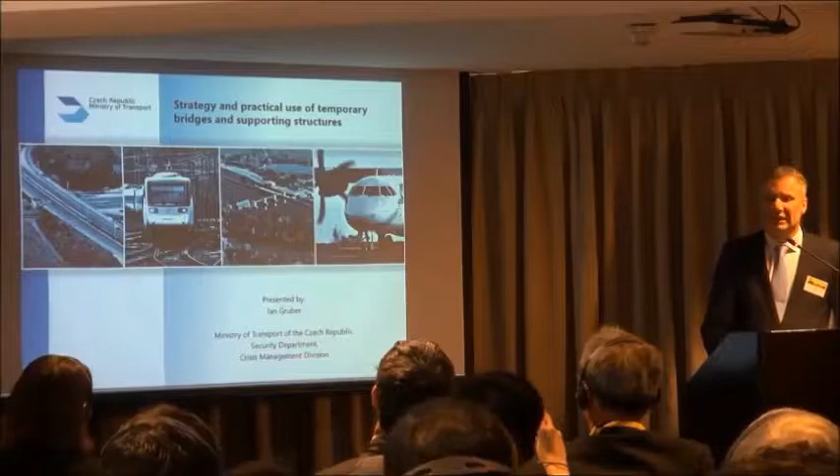My presentation is focused on the use of temporary bridges. This is the contents of my presentation. I'll skip very quickly - I'm sorry, I'm every time the longest presentation because I have 70 slides I want to show with you and share our findings with you.

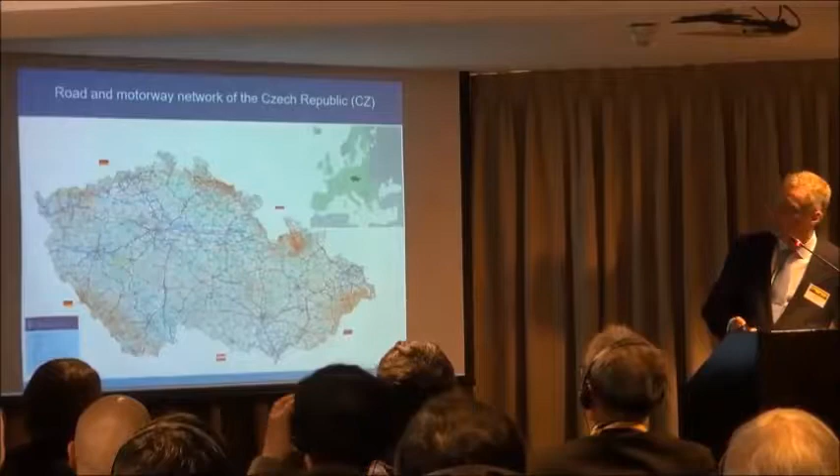First of all, I describe our country and our infrastructure. This is my country in Central Europe. We are really part of Europe, you can see in the left, on the right corner bottom. We have neighborhoods: Germany, Poland, Austria, and Slovakia. So we are not Czechoslovakia, we are Czech Republic because we separated in 1993.

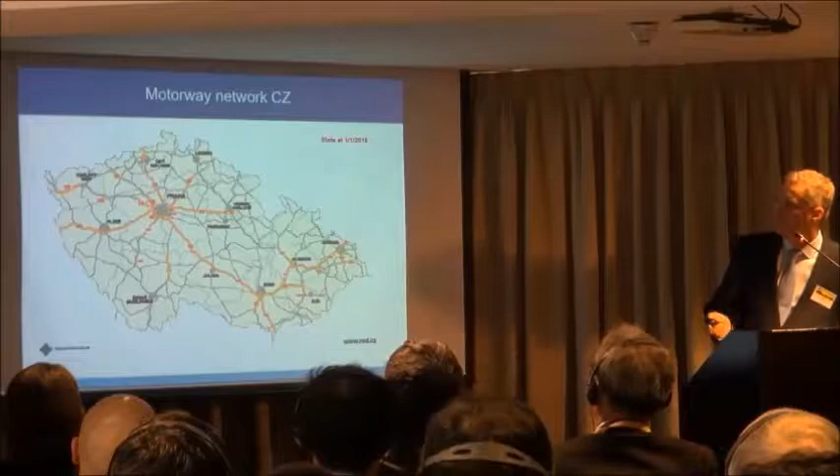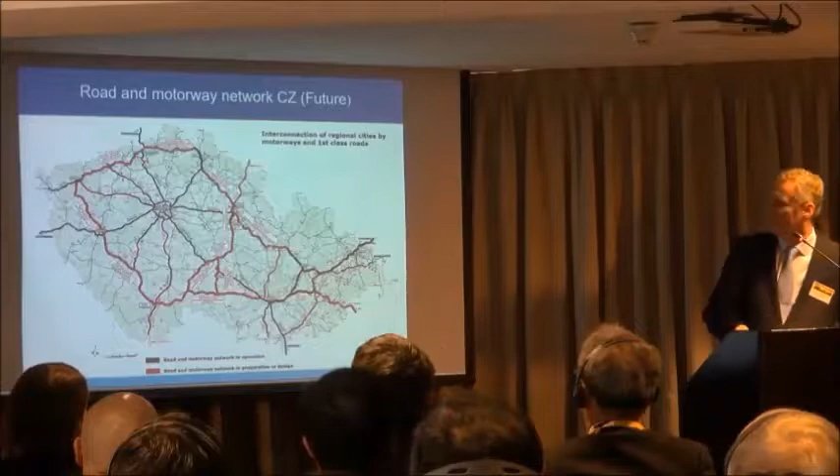This is the road and motorway network of Czech Republic. We have a very huge network, and this is only the state at 1st of January 2016 - only the motorway network, as you can see. This is some idea, a vision. We want to link every main city and region together. This is a vision, I don't know the timeframe, maybe 2030, maybe more. What is black is built, and what is red is our plan.

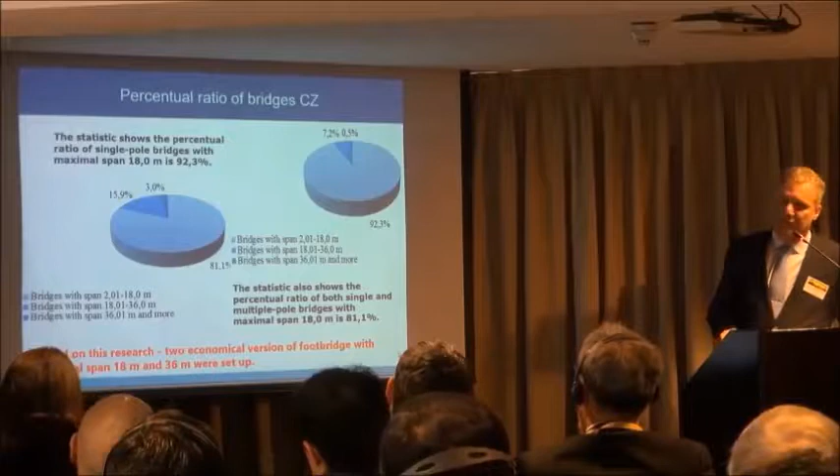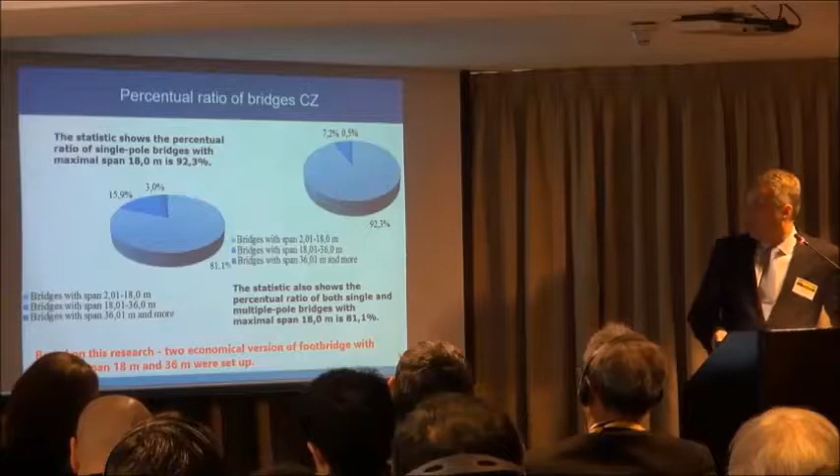On this infrastructure there are a lot of bridges, and the total is almost 1,700 bridges. From research it was found that the percentage ratio of bridges is against statistics - maximum span is around 18 meters for more than 92%, and statistics also show that the percentage ratio of both single and multiple pole bridges with maximum span 18 meters is 81%.

We face - obviously - almost always we face only floods. We don't have seas, so we don't have tsunamis, and we are in a very calm territory, so fortunately we don't have earthquakes either. So we face almost only floods.

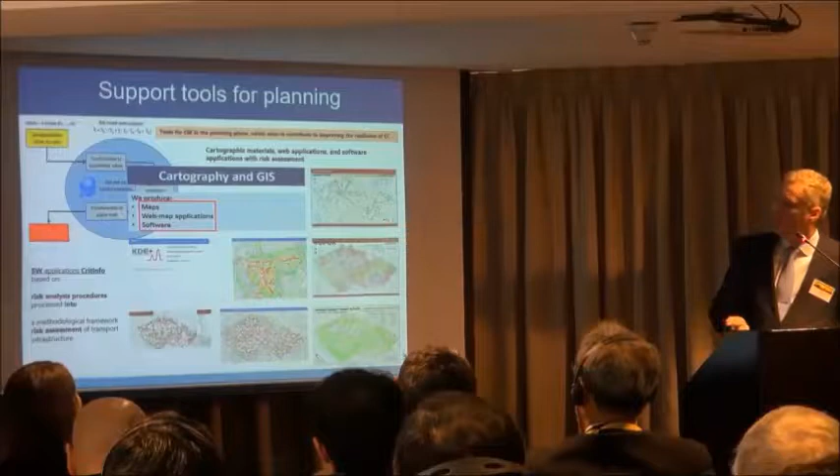How do we improve resilience of our infrastructure? We use support tools for planning, some tools for assessment of critical infrastructure, maps, web map applications, and software, which are developed especially by the academic sector.

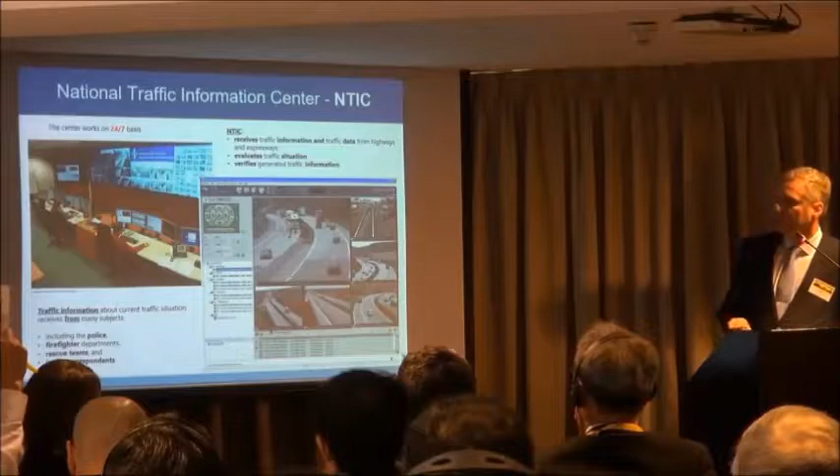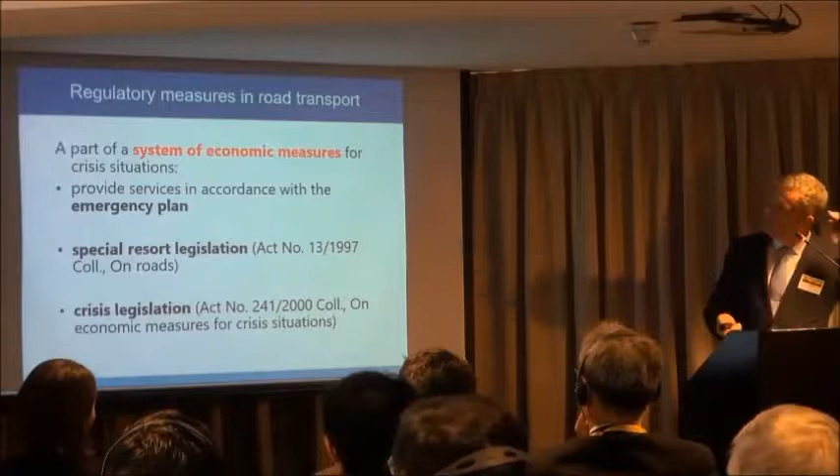We have regulatory measures for road transport, and especially systemic economic measures for crisis situations. We provide emergency plans and special resort legislation, and we use special crisis legislation as well. This is a volume of three special crisis legislations covering the integrated rescue system, crisis situations, and developing resources for crisis situations.

The main task of resilience is, of course, in transport - maintaining the mobility and functionality of bridges. For us this is particularly critical. The Ministry of Transport directs its efforts to repair damaged or destroyed bridges in crisis situations by replacing them with temporary bridge constructions.

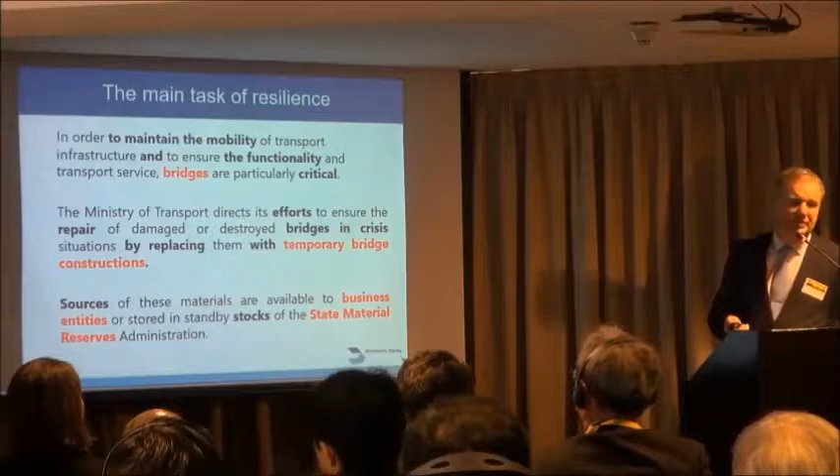We have two pools of sources: private companies, obviously construction companies, and we develop stocks and state material reserves. This is the administration - sorry.

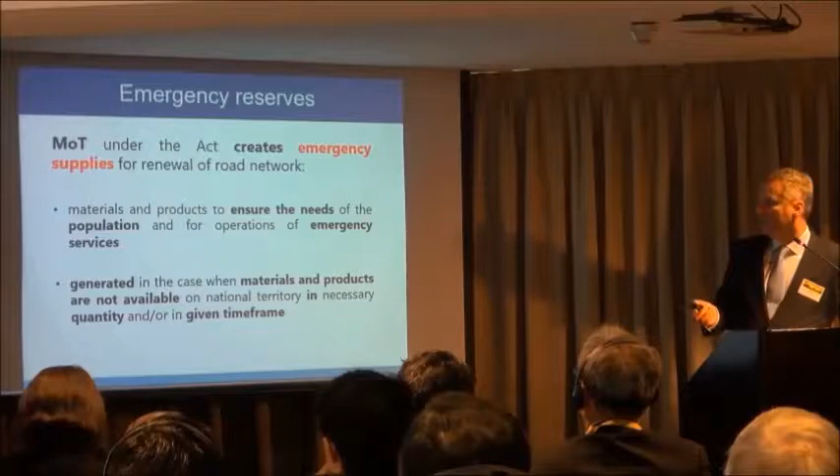Emergency reserves are created as emergency supplies by the Ministry of Transport. This is under an Act of the Ministry of Transport. These materials are intended to ensure the needs of the population and emergency services, in case needed materials and products are not available in the territory in the necessary quantity within a given time frame.

There are pictures that show how we do it. I'll skip this.

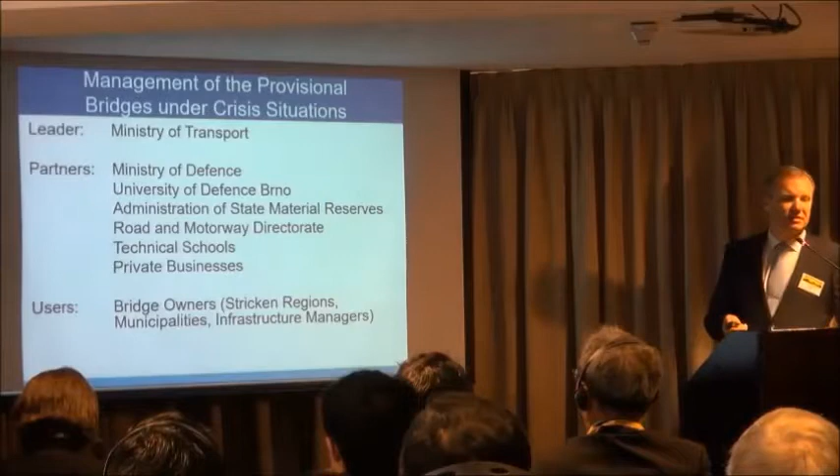We have a system for management of provisional bridges. Who is who: the key leader, of course, is the Ministry of Transport. We have a lot of partners, especially the Ministry of Defense, University of Defense, Administration of State Material Reserves, Road and Motorway Directorate, technical schools, private businesses, and of course users - bridge owners, stricken regions, municipalities, and infrastructure managers.

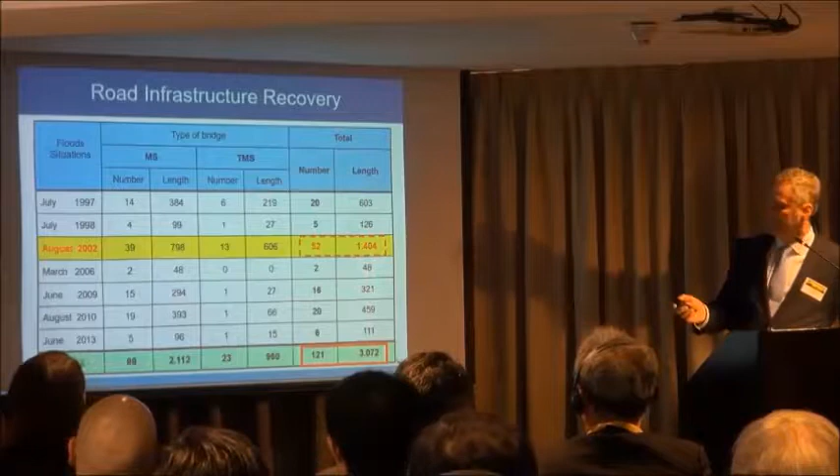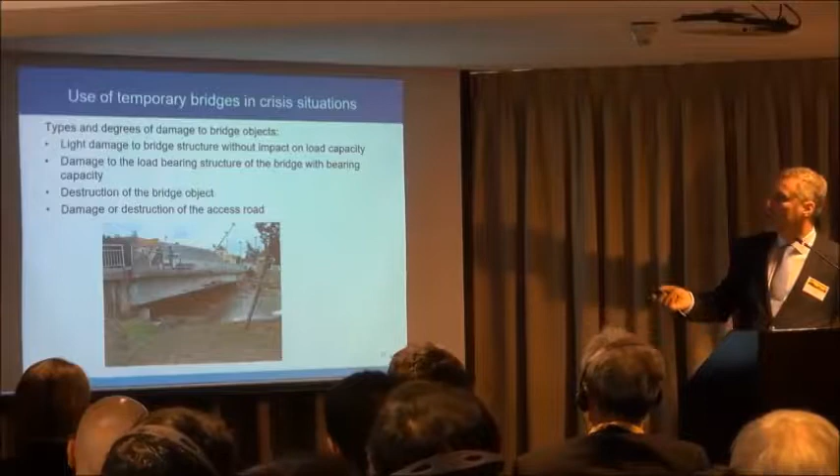What are the basic technological procedures for bridge renewal? We recognize 4 degrees of damage to bridge objects: light damage to the bridge structure without impact on load capacity; damage to the load-bearing structure affecting bearing capacity; total destruction of the bridge object; and damage or destruction of the access road.

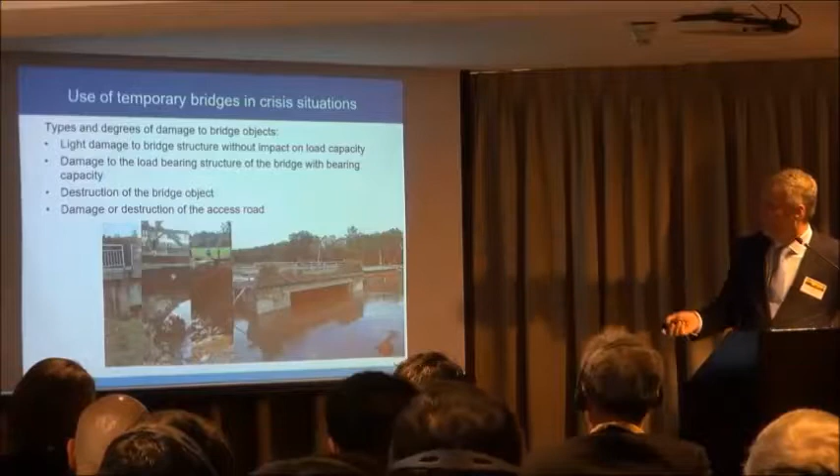So this bridge here is in good condition, but it's not possible to get on it.

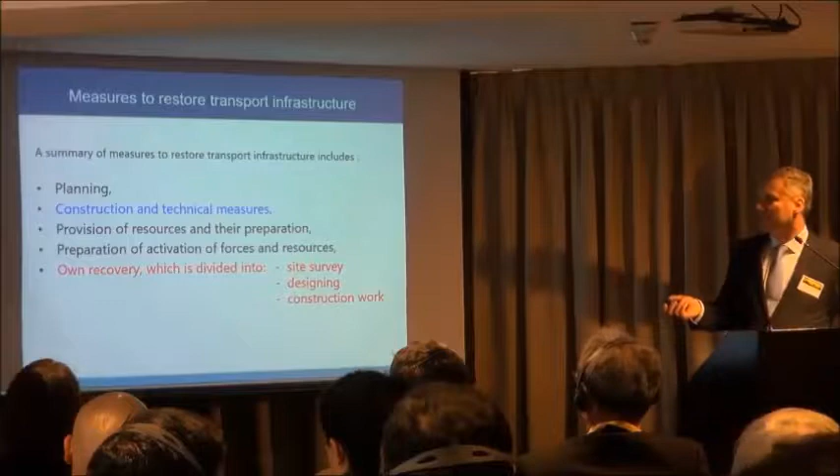Here is a summary of the measures to restore transport infrastructure: planning, construction technical measures, provision of resources and their preparation, activation of forces and resources, and recovery, which is divided into site survey, designing, and construction work.

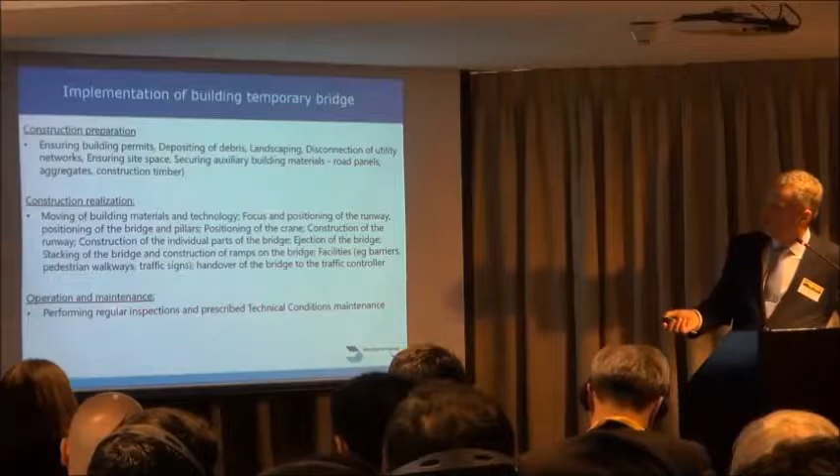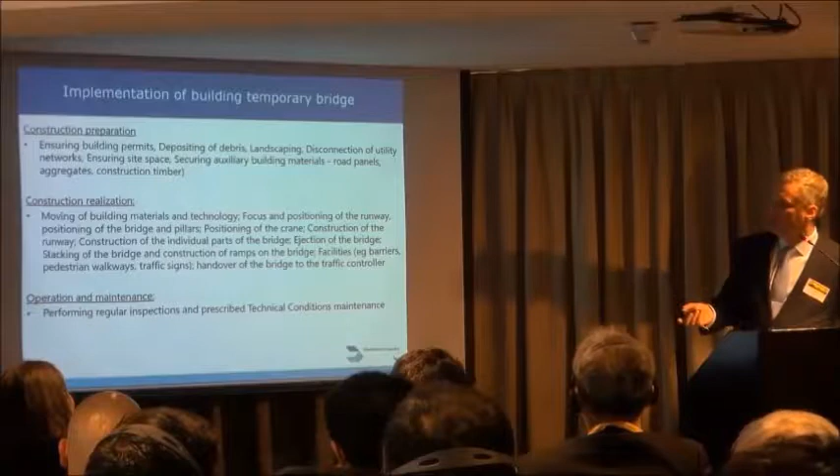Again, this is a summary of what is necessary to do. I underline the last item, operation and maintenance, especially because this is what you see in the last slides—that is very important. Maintenance after something is built.

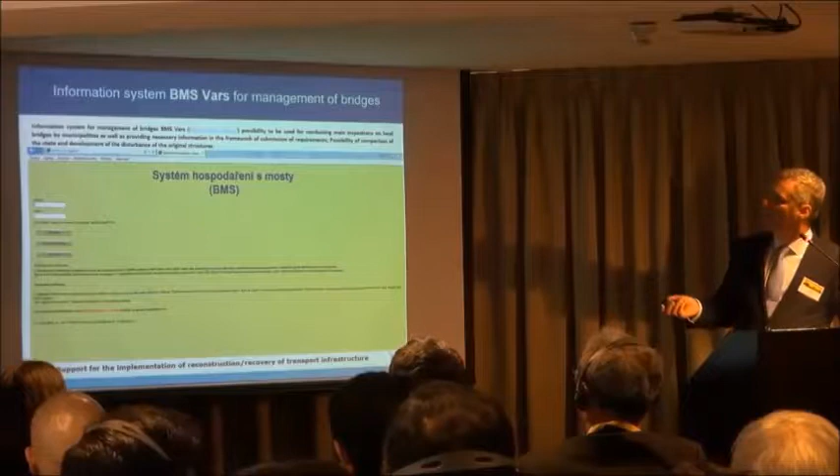We use information systems to support designers, local authorities, and owners of bridges. Technical conditions are promoted on the website of the Ministry of Transport.

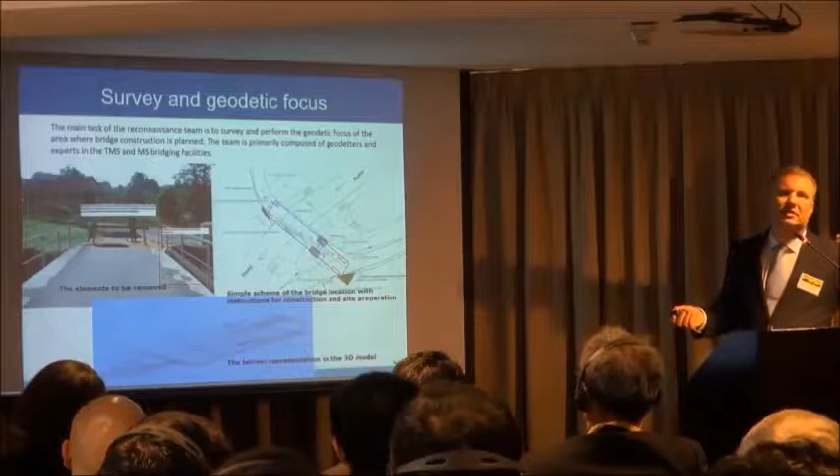For survey, the geodetic focus, we use forces from Defense University in Brno, which work in the terrain developing surveys, and are also able to develop 3D model representations, and design solutions for local and other authorities.

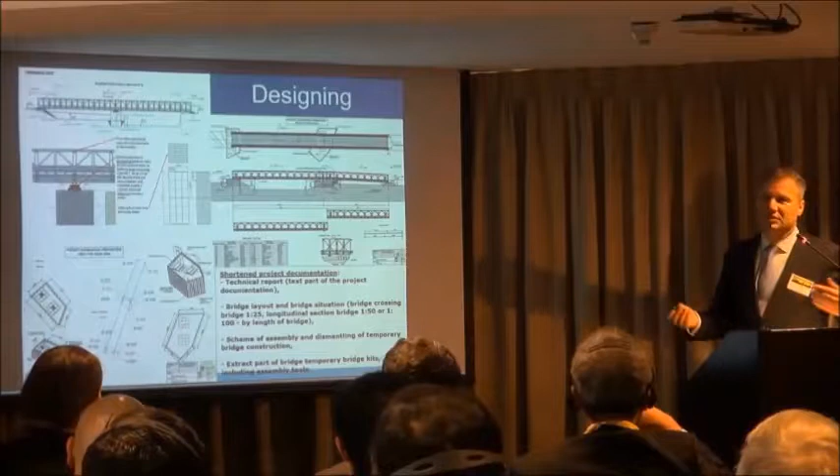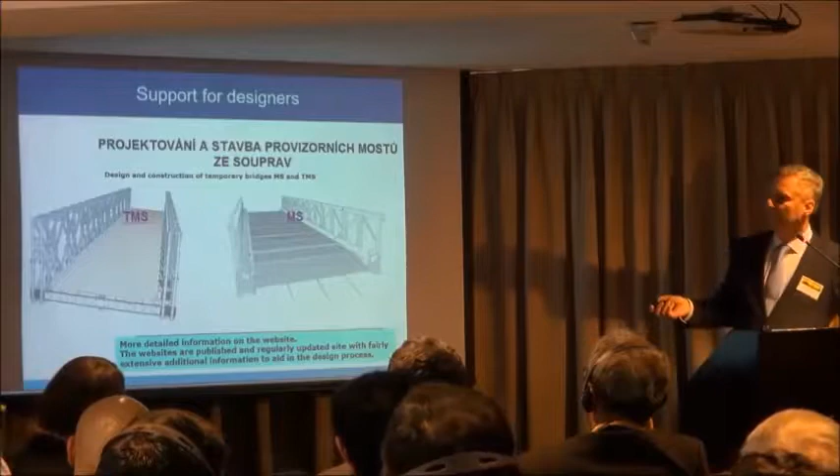This project includes technical report, bridge layout, and everything—schemas, assembly, dismantling, extract part of bridge, and temporary bridge kits, everything. Again, we support designers with websites and tools.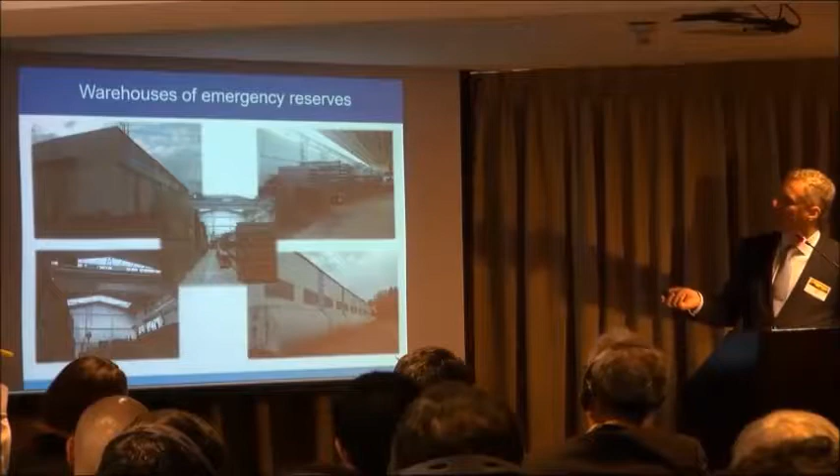Something about emergency reserves—this picture shows warehouses of emergency reserves. These warehouses are situated territorially and allocated in reasonable quantity. We need to have access to some warehouse every time. This is the current situation.

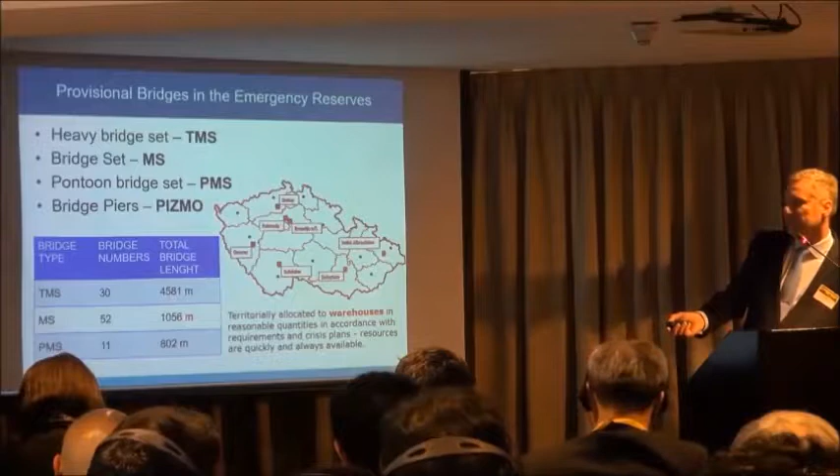Almost more than 5 kilometers of temporary bridges, and this pool includes the heavy bridge set TMS, the pontoon bridge PMS, and the bridge piers PIZMO.

Some pictures about these constructions: the heavy bridge set TMS. These constructions are only one line. This is a steel framework structure assembled from individually pre-manufactured components.

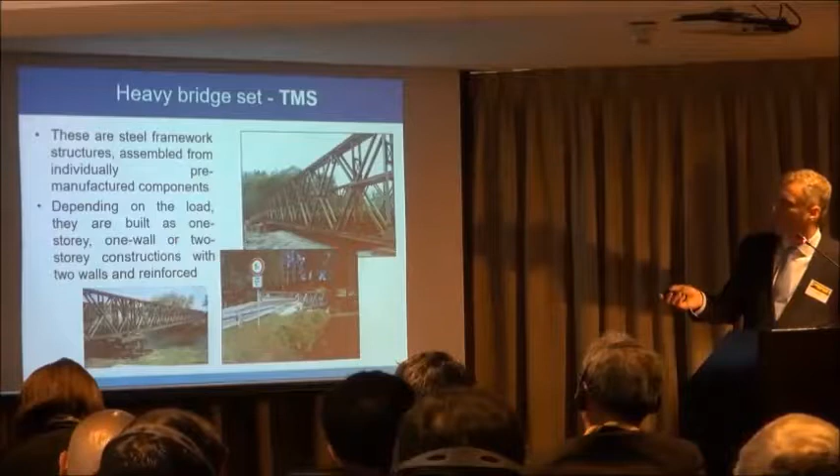This bridge set MS is composed of full bridge parts of 3 meters length. One part, then a second part, linked together. This previous construction was characterized by very quick construction.

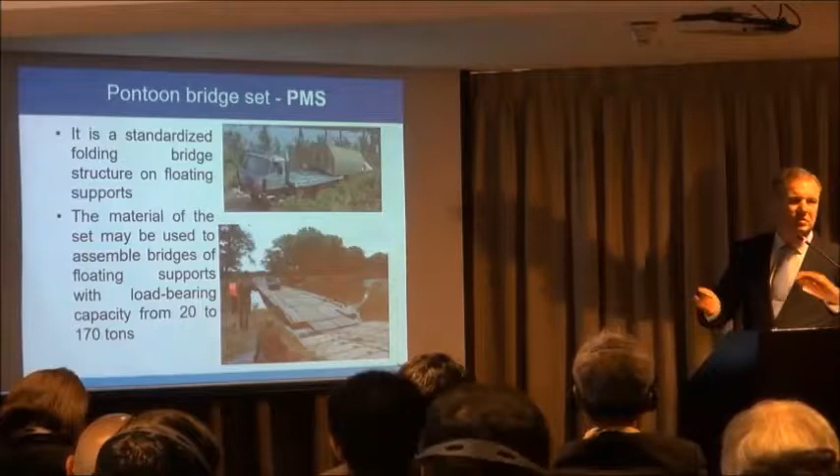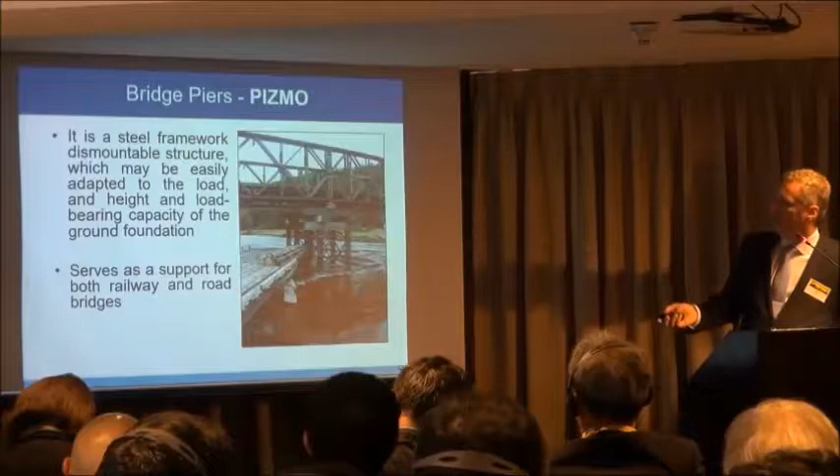The pontoon bridge PMS is only for military forces, and in some cases only for rescue services, but not for civil users. The bridge piers PIZMO is a steel framework dismountable structure used as a support for both railway and road bridges.

What is necessary? You have sources, and you have to have human resources as well. So we train people, and we keep in mind that it's necessary to develop everything, including new constructions.

The security department organizes professional courses in a very simple but useful place. As you can see, course participants are trained and educated, and they come from private construction companies, planning organizations, emergency department employees, and students from civil and military universities and colleges. Everything is free of charge for everybody, because it's funded from the Ministry of Transport budget.

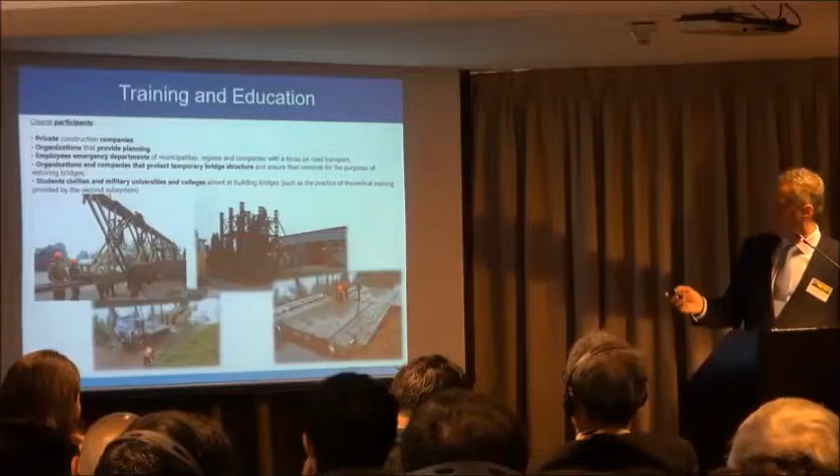This is the new prefab bridge road MMS 2005. As you can see from the number, 2005, it was designed as a single-lane bridge after the floods of 2002.

This construction is used in the design developed for the civil sector, designed in accordance with the relevant standards and other applicable regulations in the Ministry of Transport's domain, as you can see.

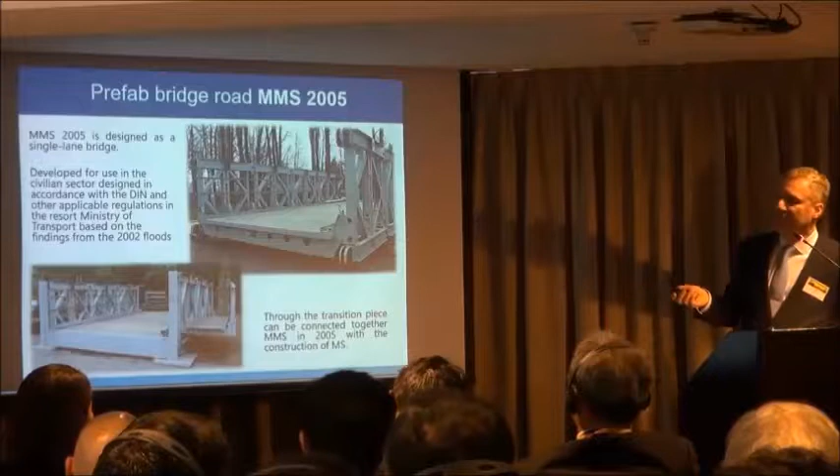After 2010, a small footbridge and temporary bridge for pedestrian and bicycle traffic was also developed, ranging from 3 to 8 meters.

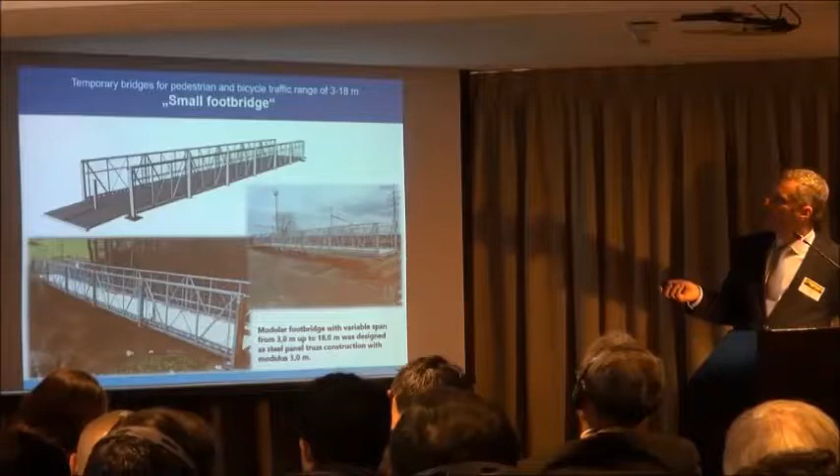Because the military construction doesn't have space for traffic, it's not possible to separate pedestrian and cycling traffic. So we have two footbridges, small and big, ranging in length from 3 to 36 meters.

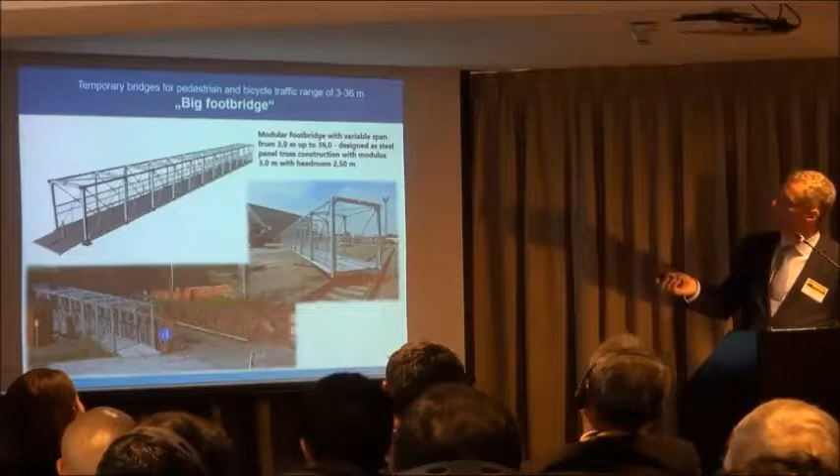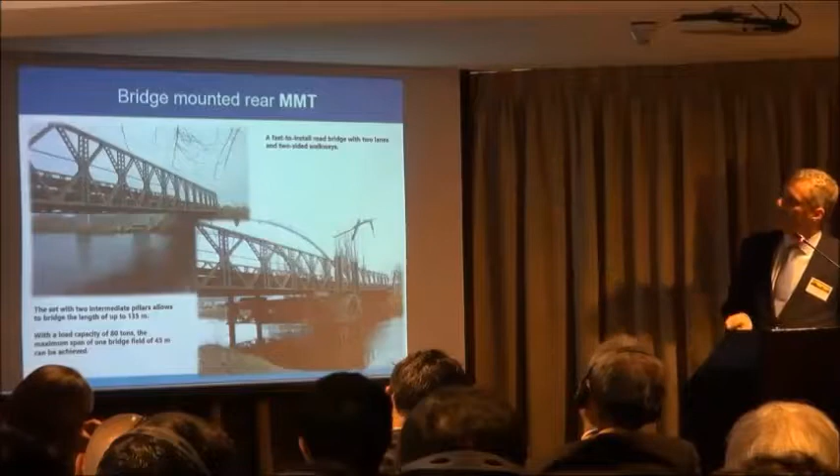We have other resources as well—again a former military structure, but this one is two lanes, the bridge-mounted rear MMT. We have, for example, a plate bridge for quick casting, with small construction height, useful for securing oversized transport, as you can see.

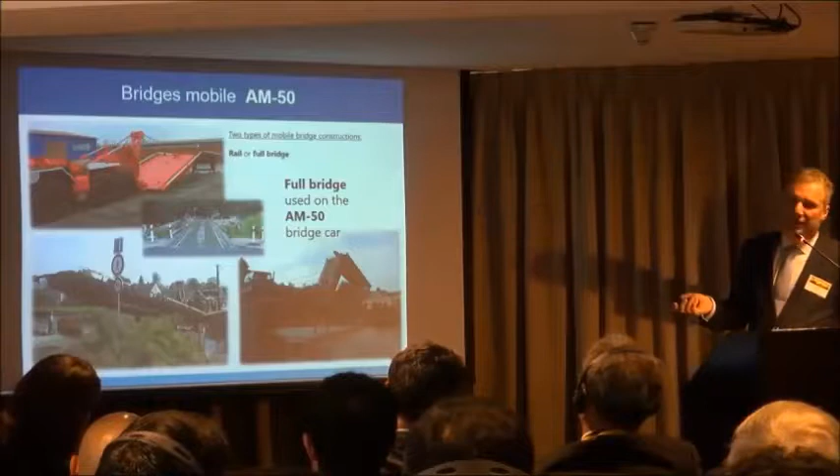We have bridge mobiles, rail or full bridge. This full bridge is used on the bridge car AM50, for rescue services—very quick evacuation. Or the rail bridge, which is used on the bridge tank MT-55 A.

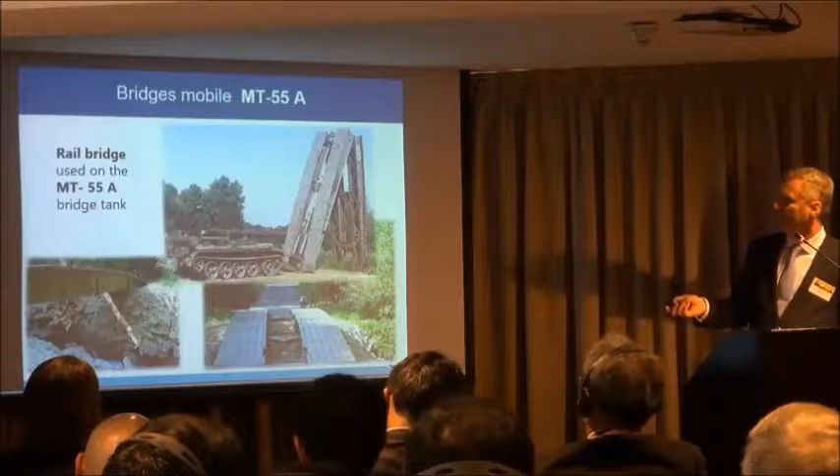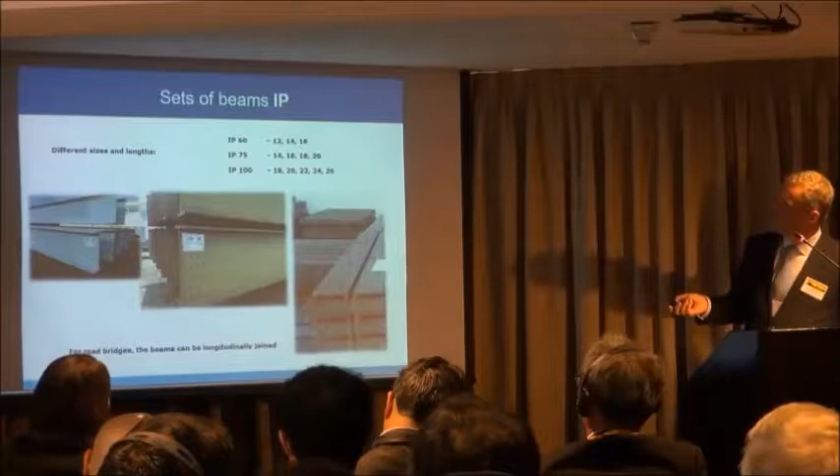During this time, we found ways to use other materials originally intended for rail transport. One of them is the set of beams IP in different sizes and lengths, and the temporary railway bridge ŽM-16, used for road traffic, as you can see.

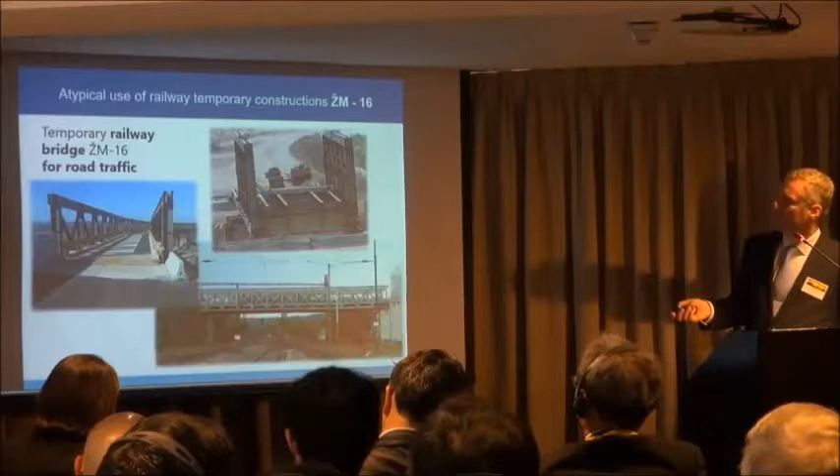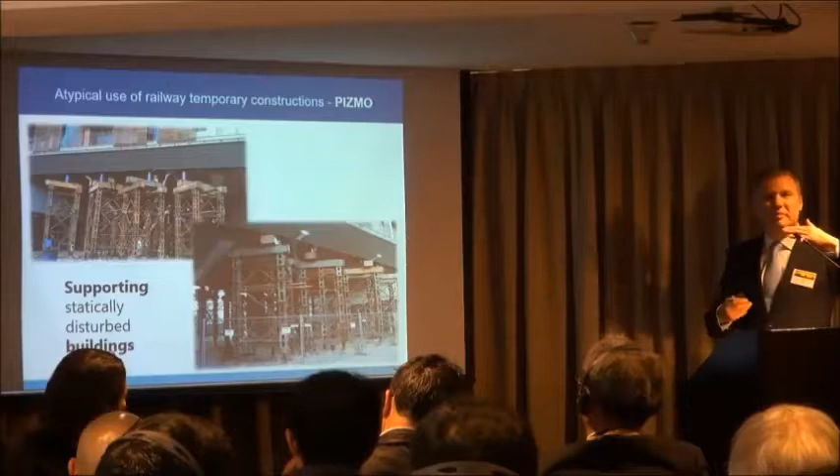This is a new example from Prague, using supporting for statically disturbed buildings. It was in Prague, I don't know exactly when, 2013 or 2020, a new construction technology. After a very quick change in temperature from 38 degrees Celsius to maybe 10, there was a problem with these new buildings.

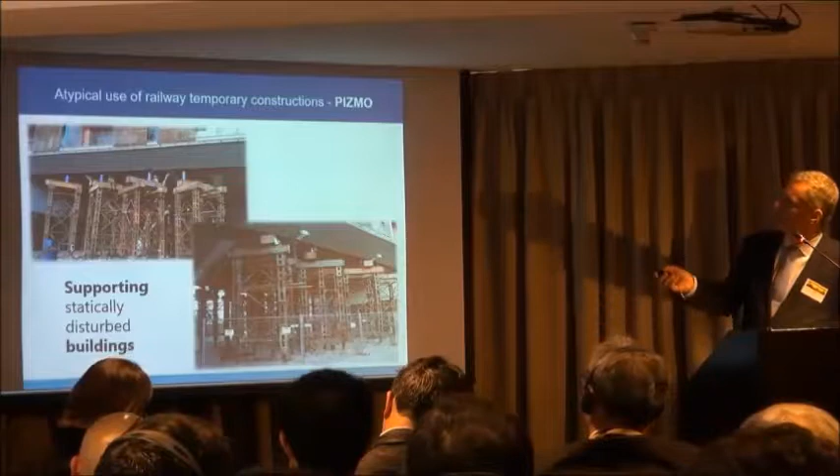So this is supporting statically using this construction.

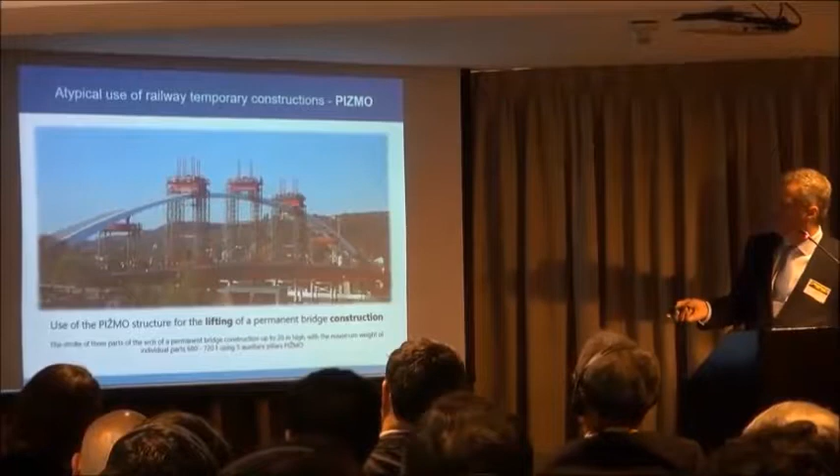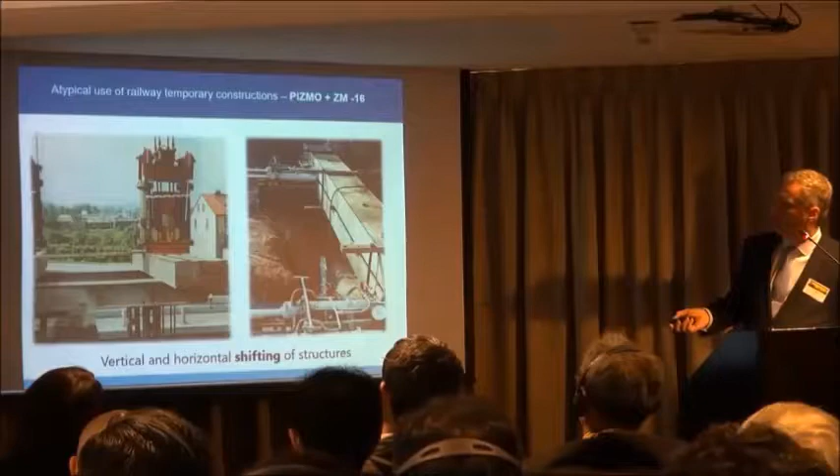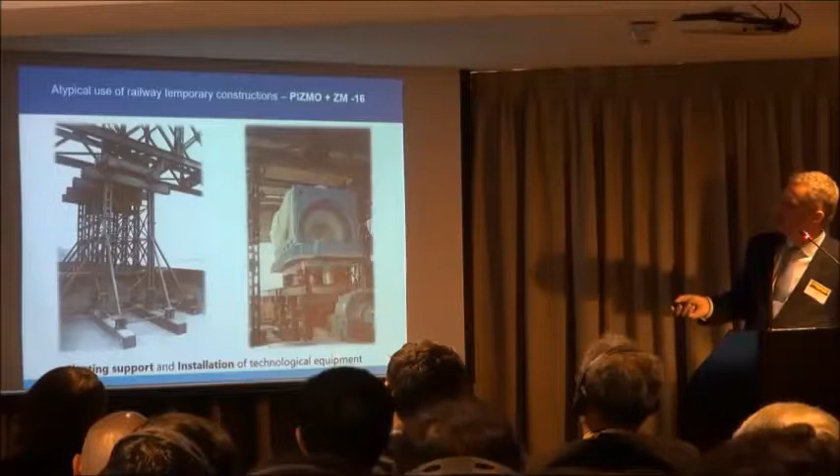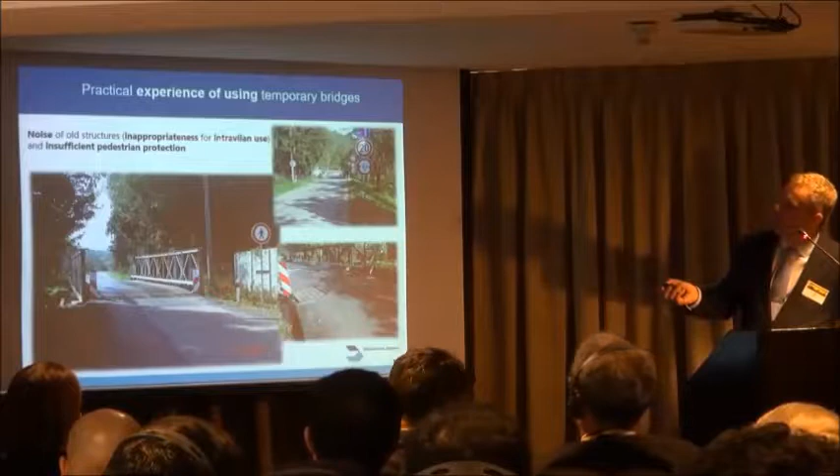What is the problem is noise. If you use this construction, because this is all military construction, noise was no problem for military, but for civilian sector it's of course a problem. So it's inappropriate for use in intravilan, and there is insufficient pedestrian protection, as I said.

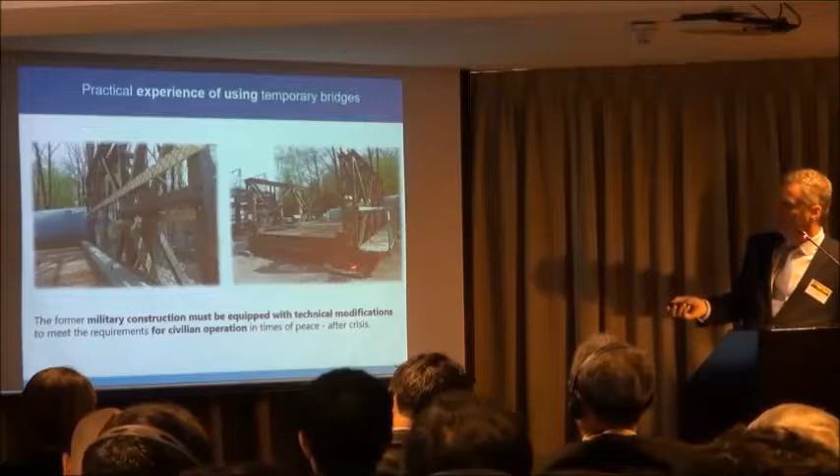We solve it this way: this military construction must be equipped with technical modification, very simple modification for civil operation.

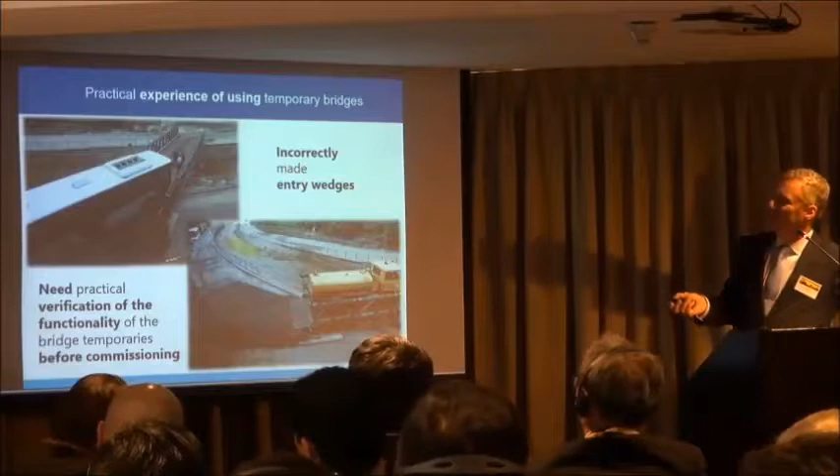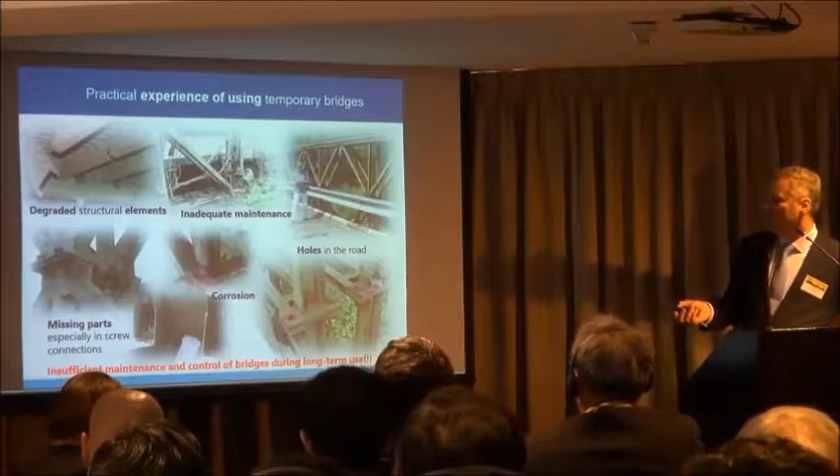This is the impact if there's no maintenance after building: degraded structural elements, inadequate maintenance, holes in the road because it's a wooden road, even missing parts, especially in screw connections, and corrosion of course.

This is really a missing screw. It's horrible, but that's real. So this is the problem if it's long-term use.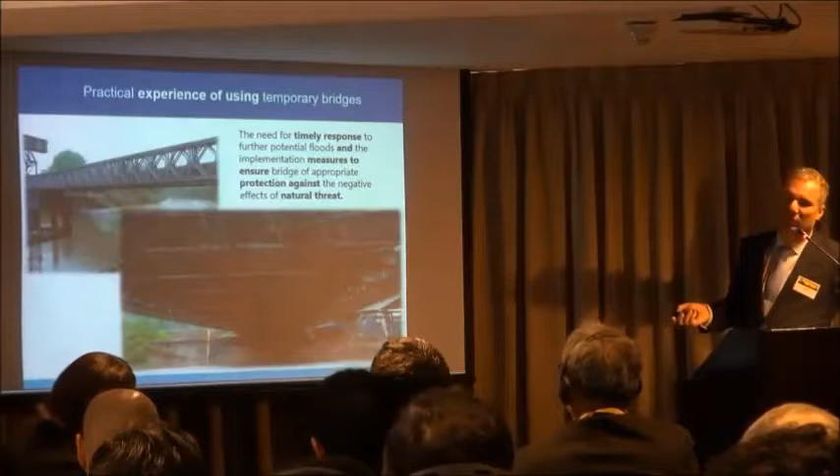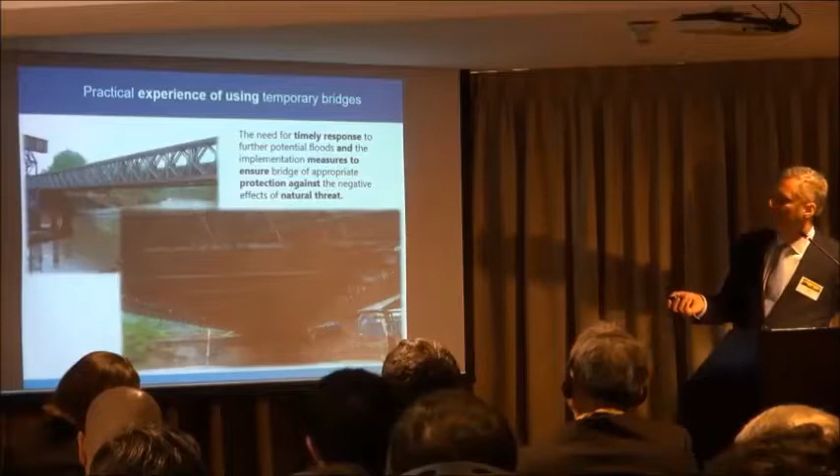Practical experience shows it's necessary to have a timely response to potential floods. Temporary bridges were built for normal construction during the construction of a new highway, but after that there were new floods, and as you can see, it was necessary to clean everything. So a very important quick response.

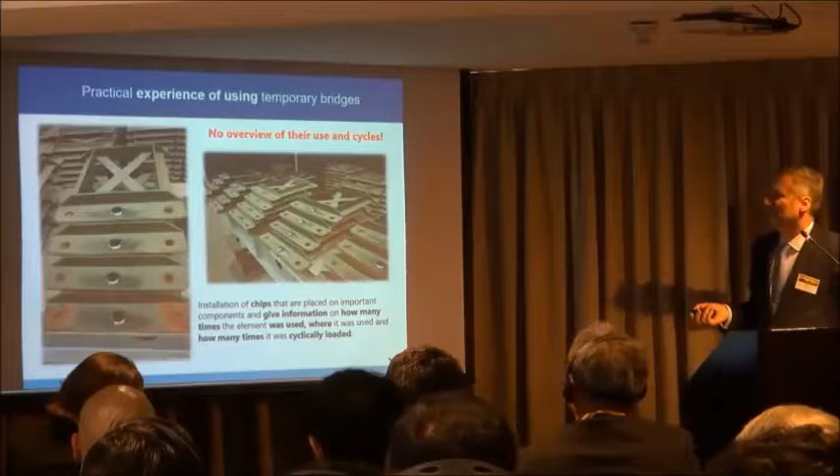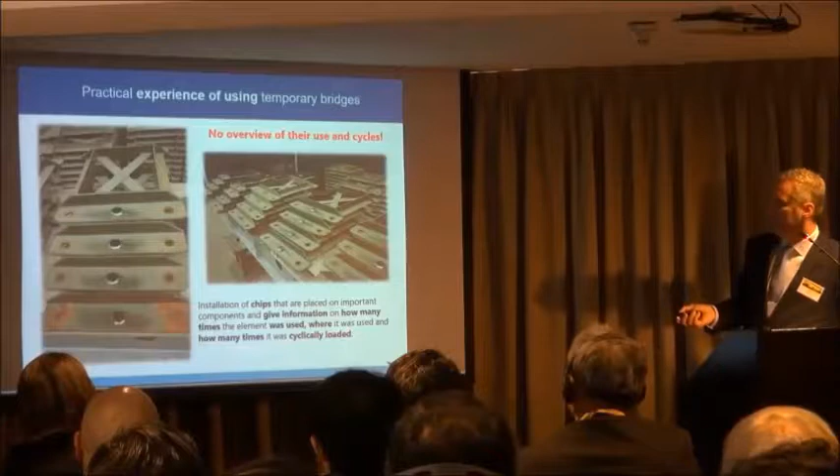Another problem is we have no overview of their use and cycles. That's the problem, so we try to solve it with the installation of chips that should give information on how many times it was used, where, and how many times it was cyclically loaded.

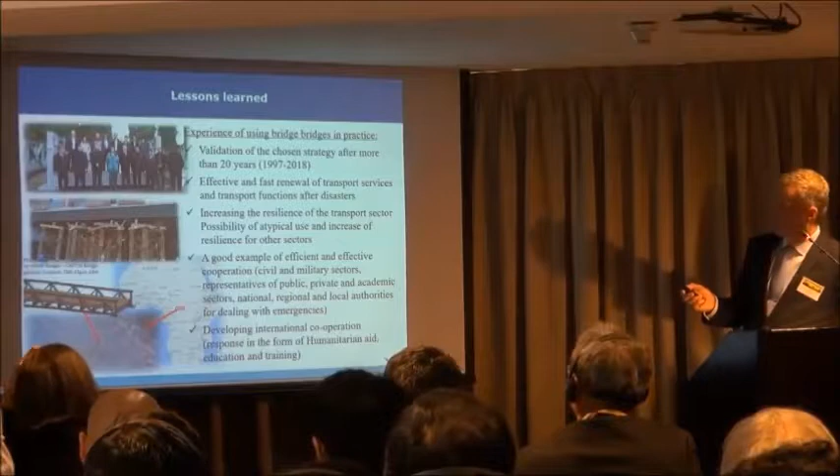Conclusions: we have experience of using these bridges in practice. Validation of the chosen strategy after more than 20 years. We are able to secure effective and fast renewal of transport services and transport functions after disasters. We are able to increase the resilience of the transport sector, the possibility of atypical use, and increase resilience for other sectors.

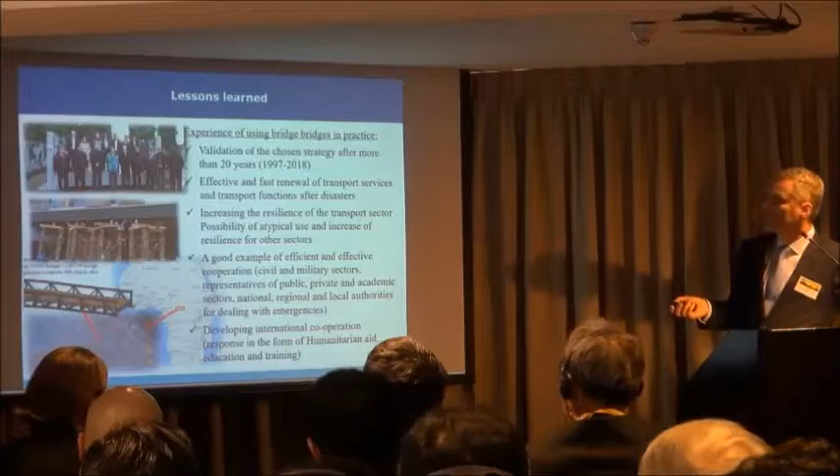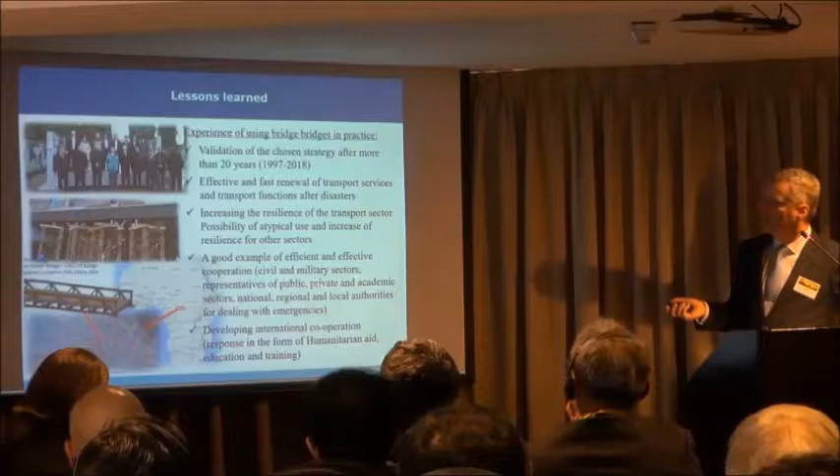We have a good example of efficient and effective cooperation with civil and military sectors, representatives across public, private and academic sectors, national, regional, and of course local authorities for dealing with emergencies. We also have very good practice developing international cooperation, because one construction was sent by air to Central African Republic as a response to humanitarian aid.

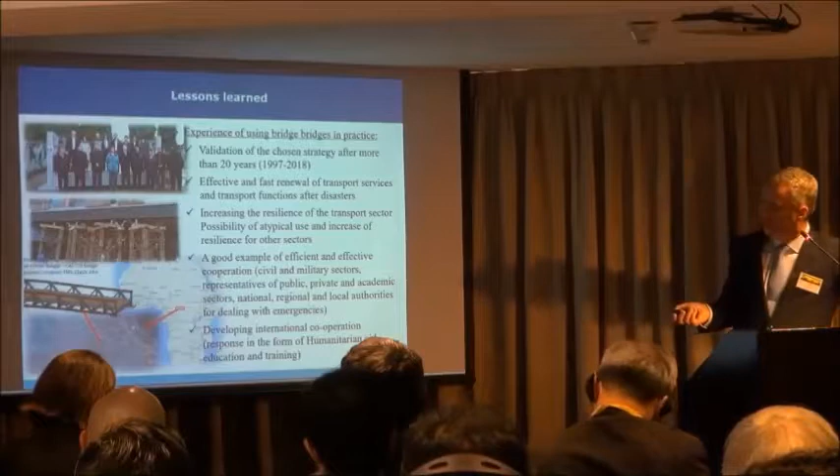And of course, in education and training, we have very good cooperation with our partners in the Slovak Republic, and now we are developing new partners in Germany as well.

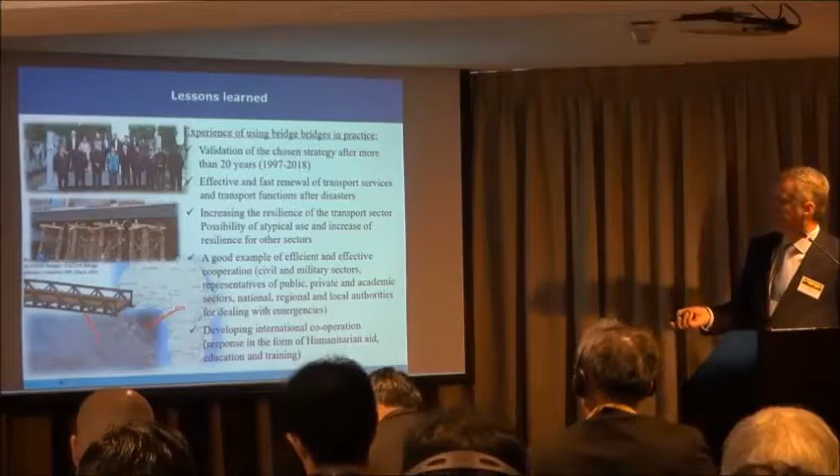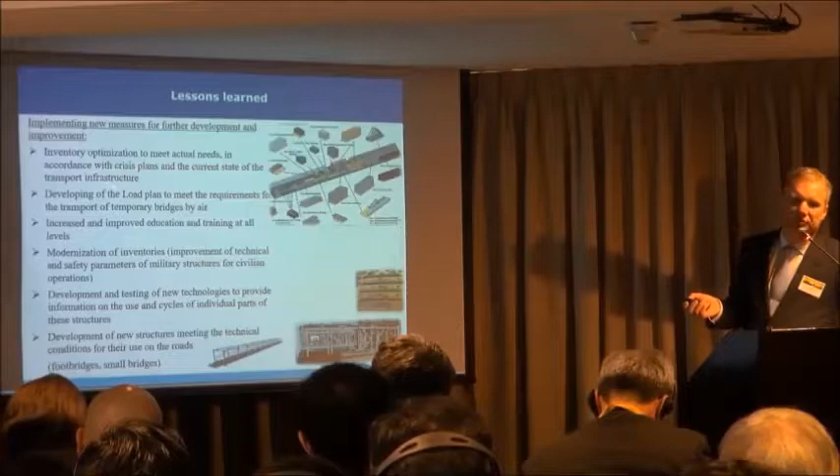Another lesson learned: implementing new measures for development and improvement. What we find necessary is inventory optimization to meet the actual needs in accordance with crisis plans and the current state of transport infrastructure, because transport is improving, becoming more resilient, with new infrastructure.

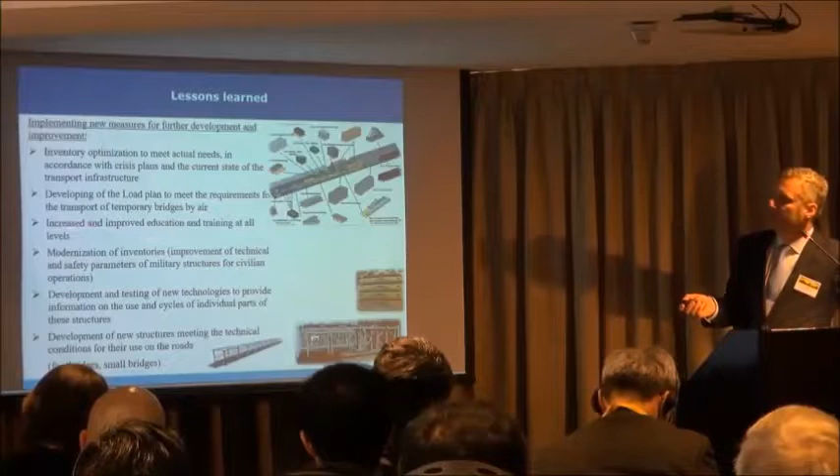Developing load plans to meet requirements for transport of temporary bridges by air, increased and improved education and training at all levels, modernization of inventories, improvement of technical and safety parameters especially of these military structures for civil operations as I said, development and testing of new technologies to provide information on the use and cycles of individual parts of these structures, and development of new structures meeting the technical conditions for their use on roads, footbridges, small bridges.

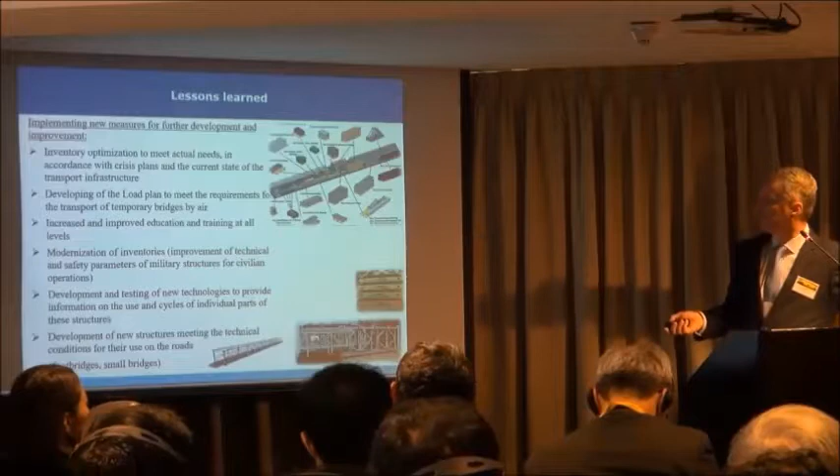So that's all about temporary bridges, and now the last three slides. Again, this is my second task.